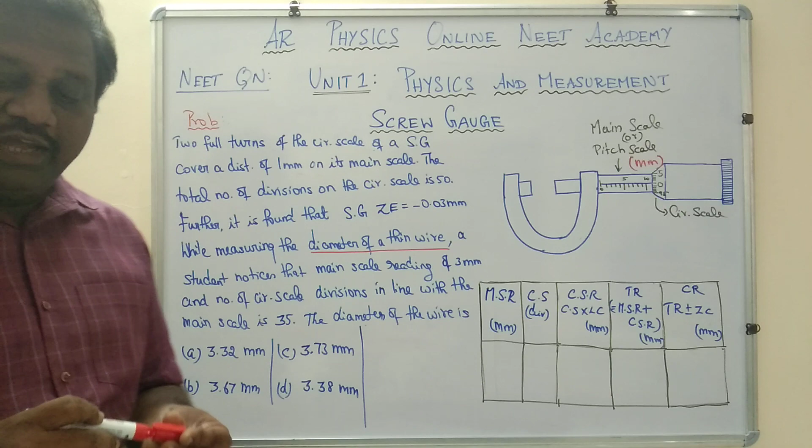Hi students, we have a screw gauge based problem. We have to find which option is right. This is a question asked in a competitive exam - finding the diameter of a thin wire using a screw gauge.

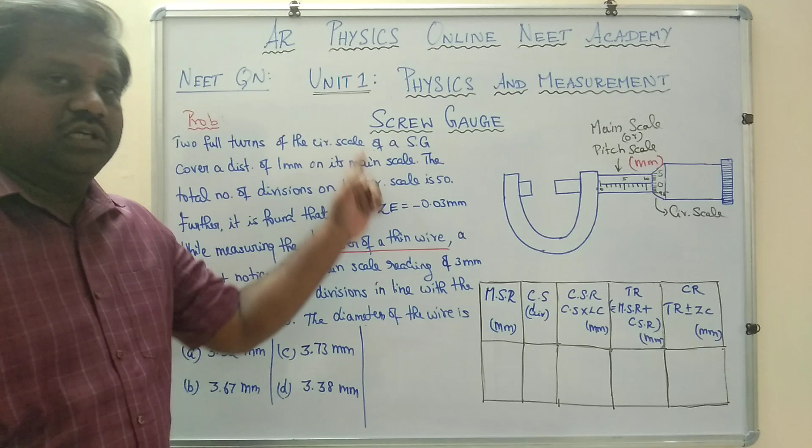We fix the wire in between these two studs, and we have to take readings. The readings are all given, and this is the tabular column - the screw gauge based tabular column.

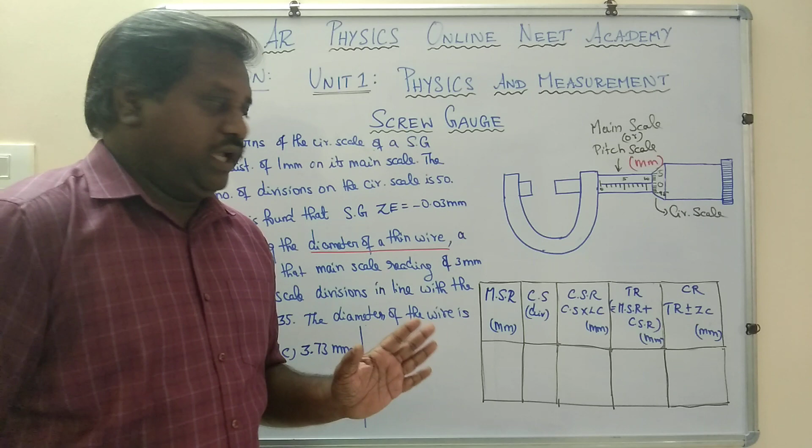If we remember this tabular column, the final reading that comes in this box will give us the correct reading, which is the right option. Let me first explain the tabular column.

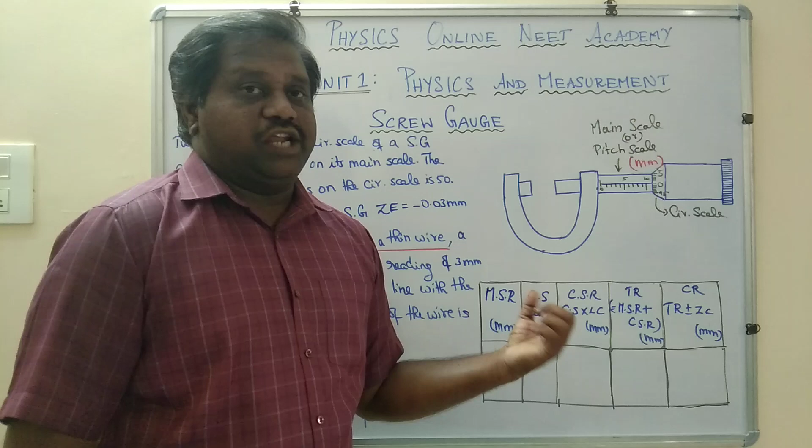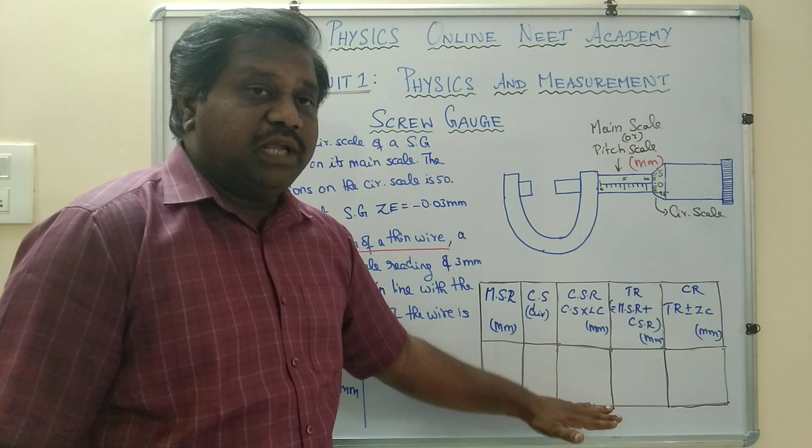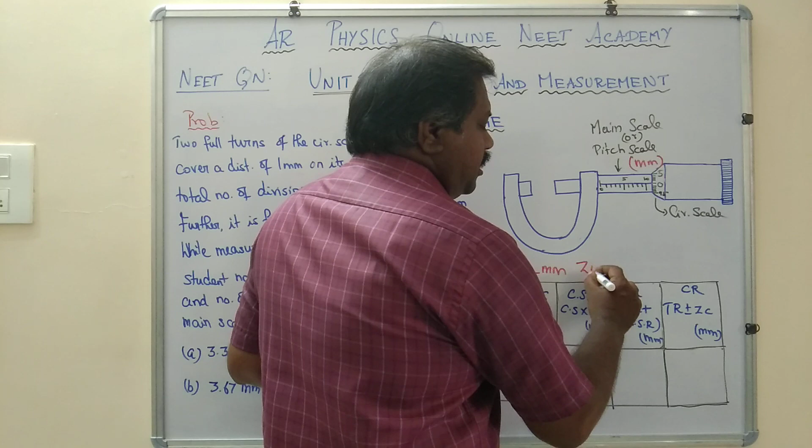Now we shall fill in all the data into this tabular column. But before filling it, at the top of this tabular column you have to write three things: one is least count, how much in millimeter; second is zero error, how much in millimeter; the third is zero correction - total reading plus or minus zero correction, so ZC. Students, only after knowing these three things can we calculate the readings here.

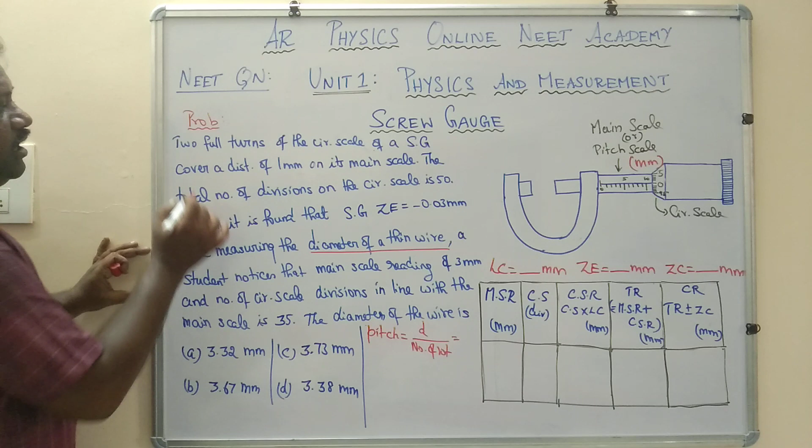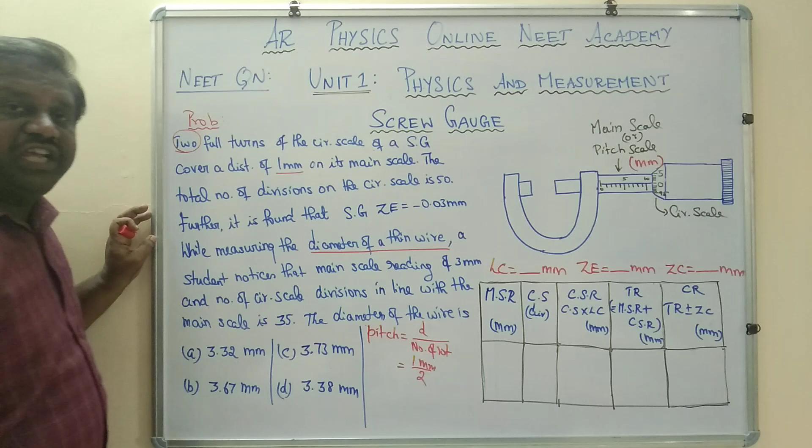Here, number of rotations is given as 2, and distance moved is 1 millimeter. So how do we calculate the pitch value? 1 millimeter divided by number of rotations 2, so 1 by 2, which is 0.5 millimeter. That is the pitch.

How to find least count? Least count is pitch divided by number of divisions on circular scale. The number of divisions on circular scale is 50. Pitch we found is 0.5, and number of divisions is 50. So 0.5 by 50, which is 5 by 500, which is 1 by 100, which is 0.01 millimeter.

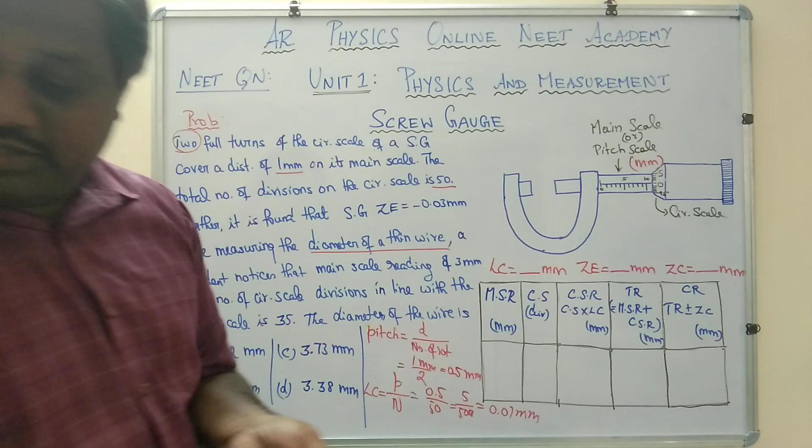So students, using the given data, I found the least count by dividing pitch by number of divisions on circular scale, where pitch is distance moved by number of rotations. So I found the least count is 0.01 millimeter.

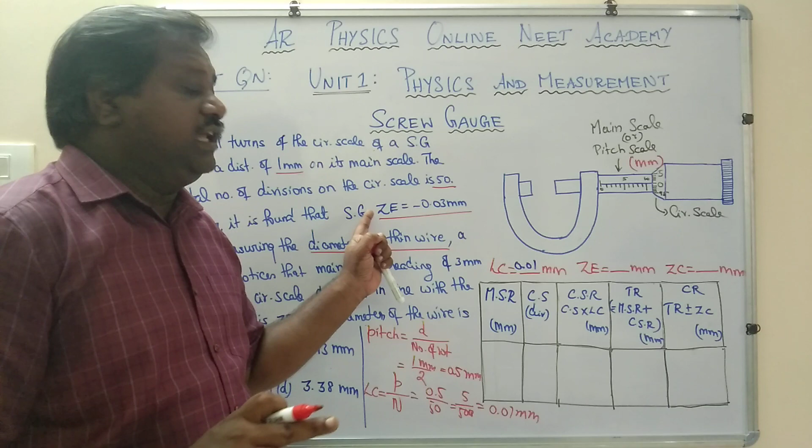Second, the information we need is zero error. What is given? Straight away they have given the zero error as minus 0.03. What does this minus indicate? It indicates that the screw gauge has a negative zero error.

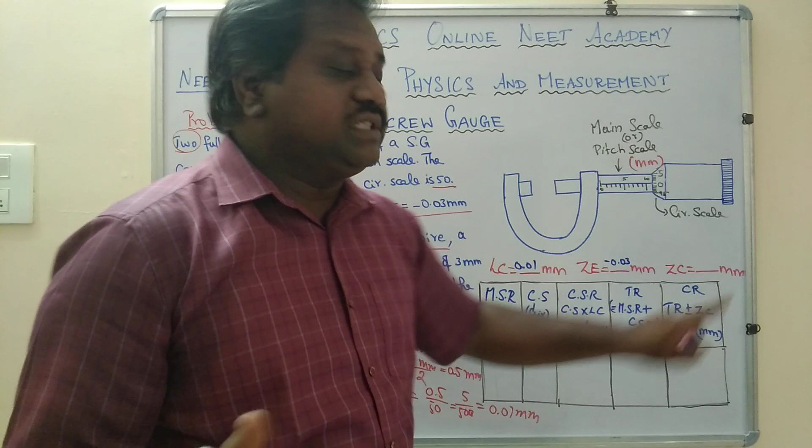Minus 0.03 millimeter. But in our tabular column, to find the correct reading we need zero correction, not zero error. Negative zero error means positive zero correction, so plus 0.03 millimeter. Okay students, only after finding these three things at the top of the tabular column can we proceed.

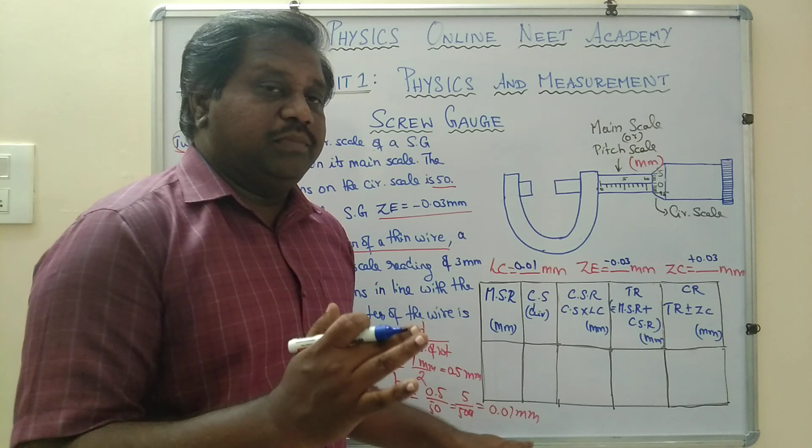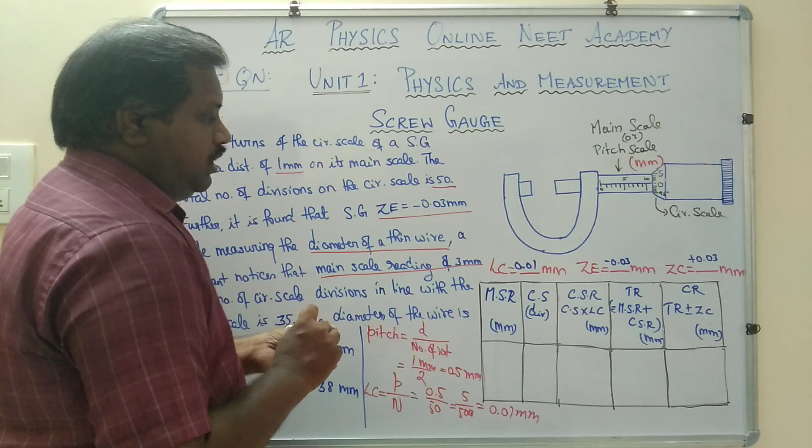What should we do next? Enter the data into the tabular column. Main scale reading is given in the question as 3 millimeter. So just put 3 here.

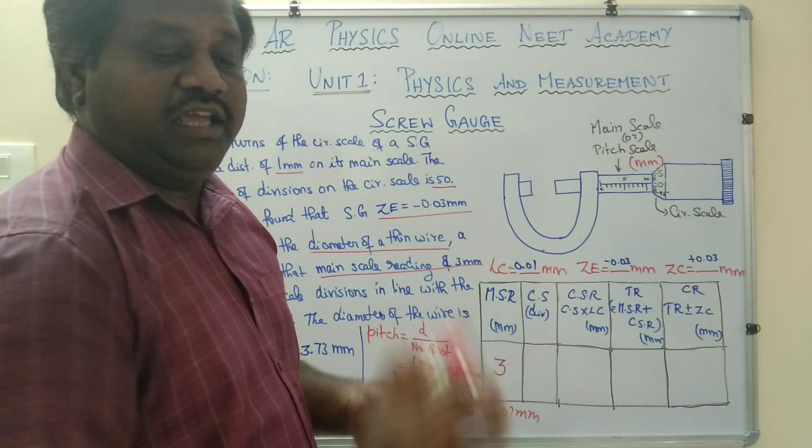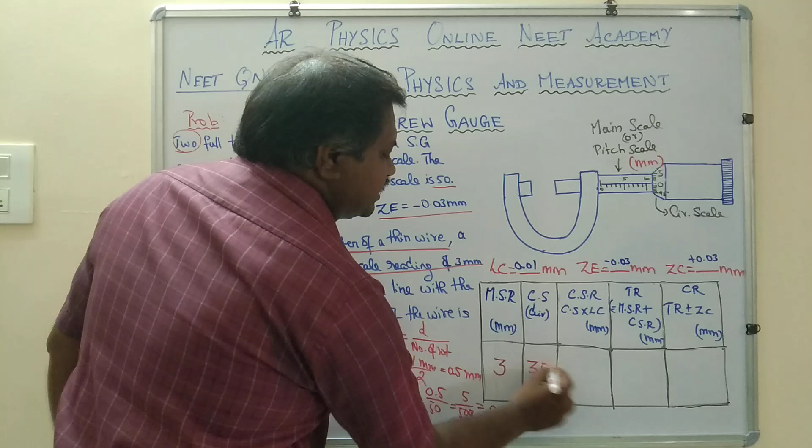After fixing the wire, students, the main scale reading is 3 millimeter, and the number of circular scale divisions in line with the scale is 35. So they have given the circular scale as 35.

Now how to find the circular scale reading? CS multiplied with least count 0.01 - students, multiply 35 with 0.01. What will be your answer? It is 0.35 millimeter.

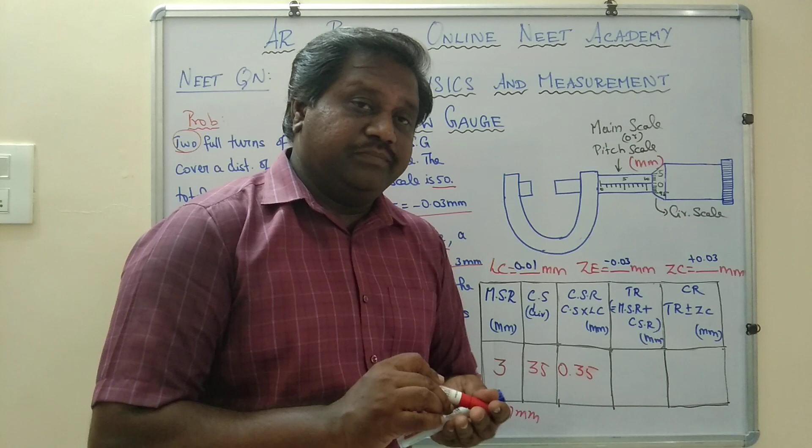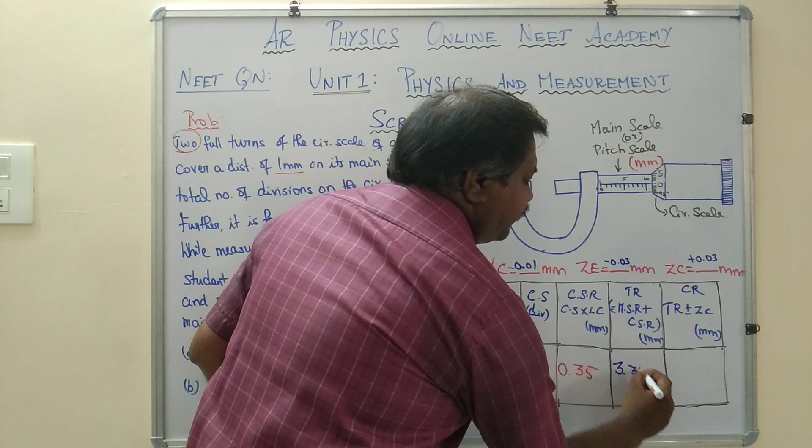Next, two columns, very simple. Total reading, how to find? Add MSR plus CSR, which is 3.35. Yes, correct reading - that is the right answer.

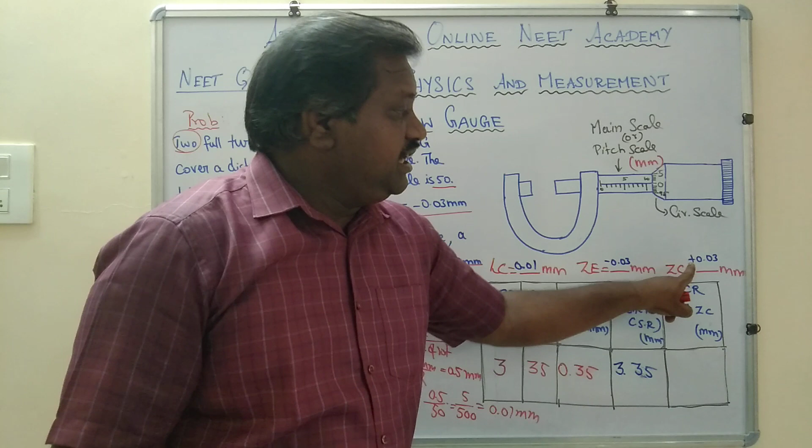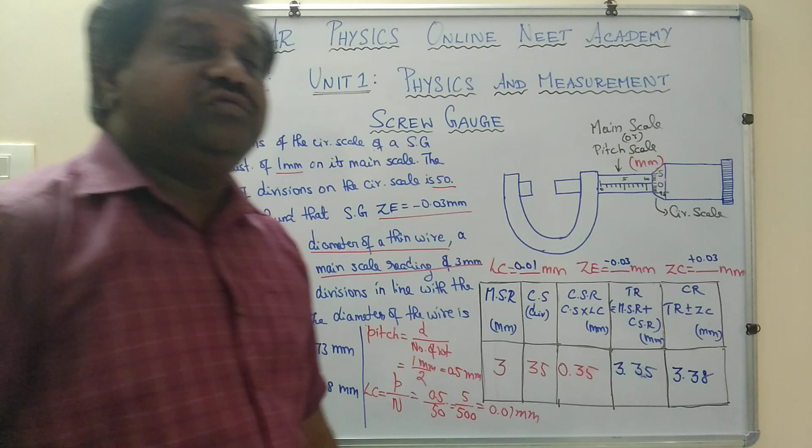How to find correct reading? Total reading plus or minus zero correction. Here we have positive zero correction. So 3.35 plus 0.03, which is 3.38 millimeter.

And students, now which option is right? You can easily identify that 3.38 millimeter is the right answer. This is one of the best example sums for screw gauge.

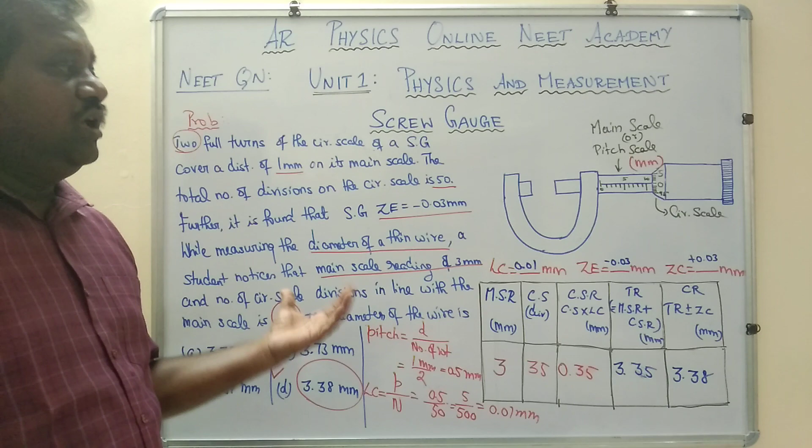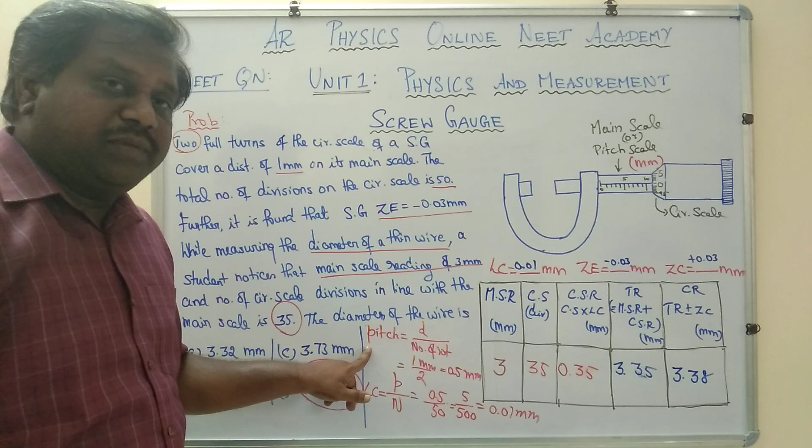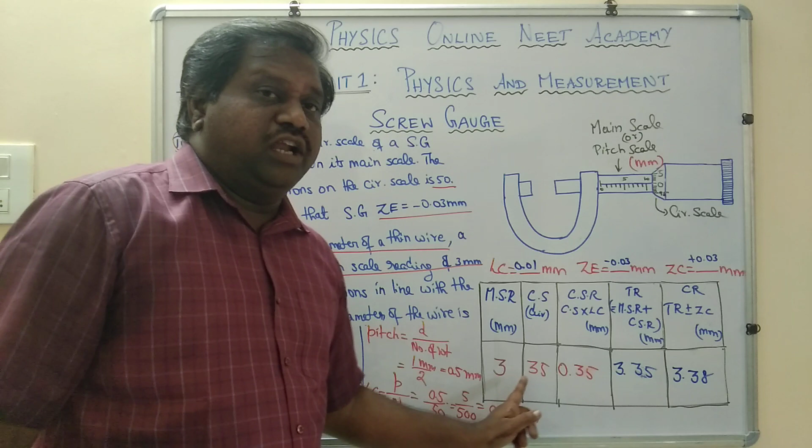They have given every detail. Using these details you find the least count, after finding the pitch value. After that they have given zero error, from that we find zero correction. In this tabular column, we note down all the readings, and finally we find the answer - 3.38 millimeter, which is the right answer.

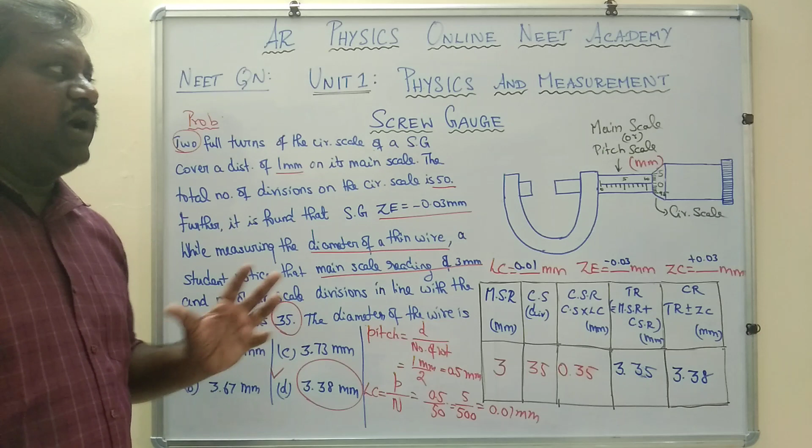So students, this is how you should deal with screw gauge problems. In the first video clip, I explained about least count, how to calculate it. In the second video clip I explained how to find zero error. In the third video clip we worked out a problem. You have to remember this tabular column, and the three things at the top of it - you must not forget them. Only then can we do these calculations in the tabular column.